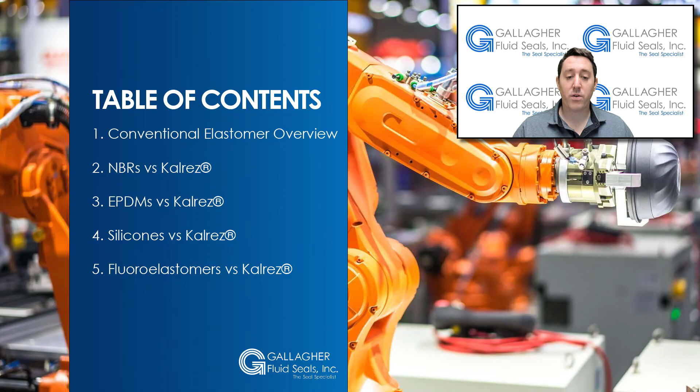Conventional elastomers come in many different types and grades. For instance, there are approximately 60 different grades of Viton, a fluoroelastomer, and 18 grades of Nordel, an EPDM. To further complicate this situation, each O-ring manufacturer or rubber fabricator then has a number of specific custom formulations or compounds for each grade. This multiplier effect essentially creates hundreds of different compounds in these conventional commercial elastomers.

Since Kalrez parts are predominantly used in sealing systems, it is useful to review the basic properties of the most popular seal materials. Other elastomers used for sealing include epichlorohydrin, ECO, PNF, polyacrylates, polysulfides, butyl, and neoprene. These materials are generally used in less demanding applications and have not been included for review in reference to use in seals.

Many grades are available of each base polymer that can be compounded to fit specific performance requirements of hardness, modulus, tensile strength, and elongation. However, regardless of what the compounder does, the basic chemical resistance properties of the polymer chain remain the same. We can, therefore, classify the properties and upper service temperatures of each polymer with some certainty.

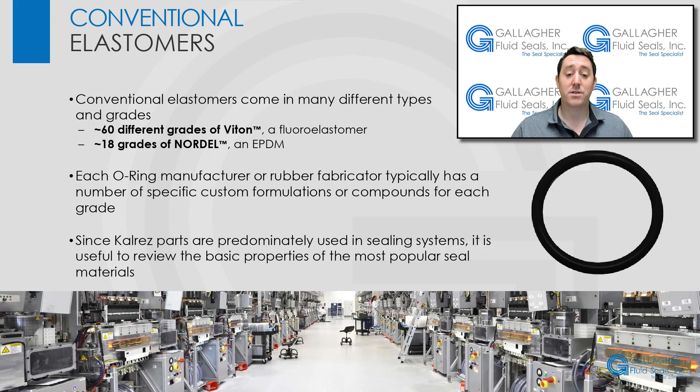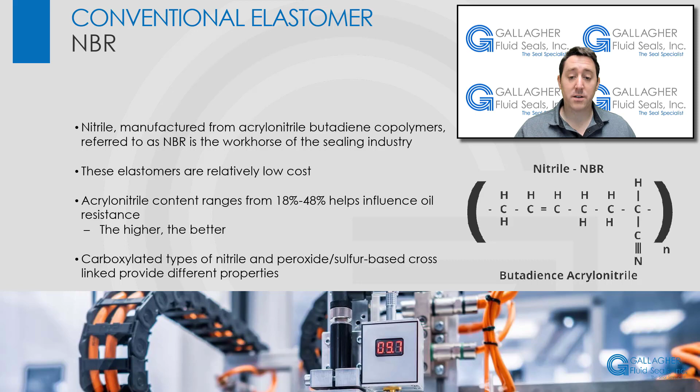Nitrile, manufactured from acrylonitrile butadiene copolymers, referred to as NBR or Buna-N after the original Bayer trademark, is the workhorse of the sealing industry. Acrylonitrile butadiene copolymers are relatively low-cost elastomers. The acrylonitrile content, which can vary from 18 to 48%, influences the oil resistance. The higher the content, the better the aromatic oil resistance. Carboxylated types offer higher service temperature limits, up to 250 degrees Fahrenheit. Peroxide and sulfur-based cross-linked systems are also used for certain applications.

Ethylene propylene copolymers, or EPR, are peroxide cross-linked. DuPont's EPDM, Nordel, as a terpolymer has diene added to the chain, which gives it the ability to be cross-linked with peroxide or sulfur-cured systems. Ethylene propylene elastomers are relatively inexpensive, and the best in pure uncontaminated steam-water service, up to 320 degrees Fahrenheit. This elastomer is often used in boiler feed water applications and for heat exchanger gaskets.

EPR rubber, however, has no oil resistance and very limited chemical media resistance. These elastomers have been proposed for use up to 450 degrees Fahrenheit in the absence of oxygen, as in downhole geothermal well service.

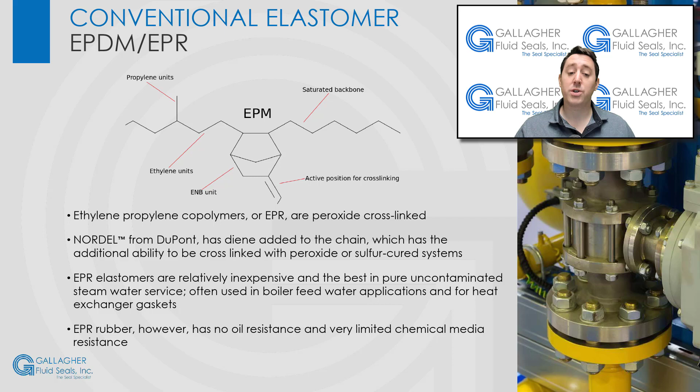Silicone was one of the first elastomers used for high-temperature service and is the highest production specialty elastomer produced today. Silicones have limited original physical properties at room temperature, but they retain most of their original tensile strength and tear resistance at elevated temperatures. Silicone is commonly used over its temperature limit, possibly because degradation byproducts are not nearly as toxic or corrosive as those produced by fluoroelastomers. Rapid hardening and embrittlement can be expected over 400 degrees Fahrenheit.

Silicone rubbers have no aromatic or aliphatic oil resistance, and in general, poor chemical resistance. Conversely, silicones have the best low temperature rating of any elastomer, down to negative 112 degrees Fahrenheit. It is important to note that at high temperatures in the absence of oxygen, silicone will begin to revert back to its original monomer state, resulting in a cheesy consistency and complete loss of physical properties.

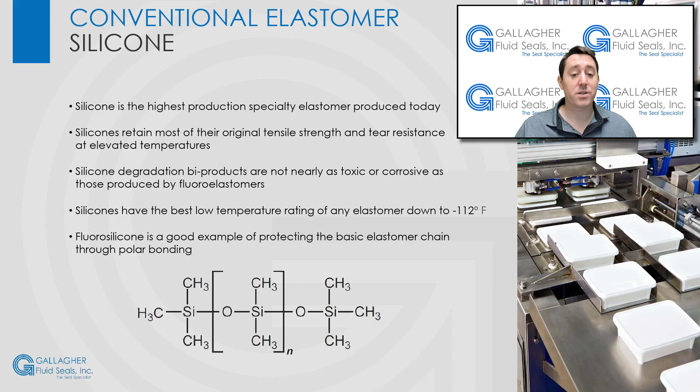Fluorosilicone is a good example of protecting the basic elastomer chain through polar bonding. The addition of fluorine to the basic silicone chain imparts very good oil-fuel resistance to the elastomer while retaining excellent low-temperature properties. Otherwise, fluorosilicones are much the same as silicones, apart from cost, which is much higher.

There are many grades or types of fluoroelastomers utilizing various cross-linking systems to achieve specific properties. The higher their fluorine content by weight, the more resistant the fluoroelastomers are to chemical media. Accordingly, TFE-propylene, or AFLAS, will swell much more than the Viton A, B, or G types in most chemical media.

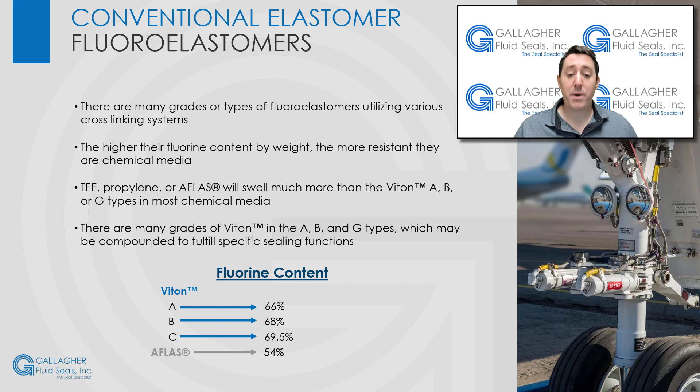There are many grades of Viton in the A, B, and G types, which may be compounded to fulfill specific functions, like anti-extrusion or lower compression set. Different cross-linked systems have a pronounced effect on water resistance. For instance, the peroxide lead oxide cross-linked Viton GF types are superior to other Viton types in hot water and steam. There is a low-temperature service Viton, GLT, which has chemical resistance similar to Viton A.

Viton B types have a high-temperature heat resistance up to 425 degrees Fahrenheit. All other grades are rated up to 400 degrees Fahrenheit. On the other hand, all fluoroelastomers will quickly swell beyond usefulness in ketones, esters, and some ethers.

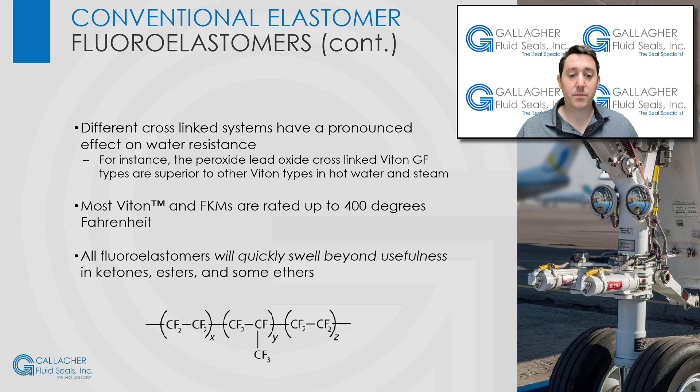Since Kalrez has the highest fluorine content of any commercial elastomer, approximately 73%, and is fully fluorinated on the backbone of the main chain, it is unique in offering an unsurpassed combination of heat and chemical resistance. Comparing the chemical structures of fluoroelastomers to that of Kalrez clarifies why Kalrez parts have such an outstanding performance in terms of heat and chemical resistance.

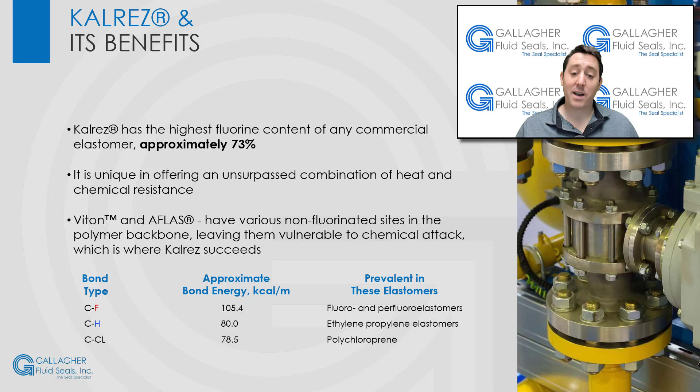Fluoroelastomers, Viton and Aflas, have various non-fluorinated sites in the polymer backbone, leaving them vulnerable to chemical attack. It is at these carbon-hydrogen sites unprotected by the polar umbrella of fluorine that the destruction of the chain can be initiated by aggressive environments or high temperatures. Furthermore, the cross-linking system used with fluoroelastomers is phenol or peroxide, making it susceptible to attack and unable to survive temperatures over 400 degrees Fahrenheit.

By comparison, Kalrez structure is completely protected by fluorine on every carbon or oxygen atom along the entire length of the polymer chain, and in most cases the cross-link is also fluorinated, further stabilizing the whole structure. All the cross-link structures used in Kalrez are designed to be stable up to 600 degrees Fahrenheit.

Kalrez parts are often used in environments where conventional elastomers, such as nitrile, EPR, fluoroelastomers, or silicones, are satisfactory from a chemical resistance point of view, but the actual service temperature of the application exceeds the higher temperature rating of the elastomer. In addition, in aggressive chemical environments, Kalrez may be required well below the upper service temperature limits of conventional elastomers. Nitrile, EPR, fluoroelastomer, and silicone will become hard and brittle when used beyond their upper service temperatures.

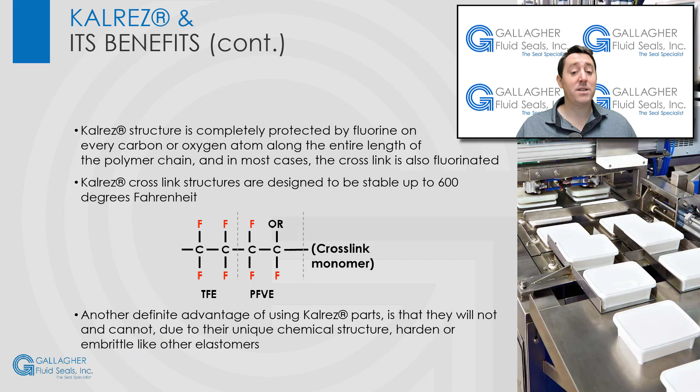Another definitive advantage of using Kalrez parts is that they will not and cannot, due to their unique chemical structure, harden or embrittle like other elastomers. Conversely, Kalrez actually becomes slightly softer and retains its sealing ability when in service at elevated temperatures. These are the maximum service temperatures of most common elastomers. Kalrez is by far the most heat-resistant commercial elastomer.

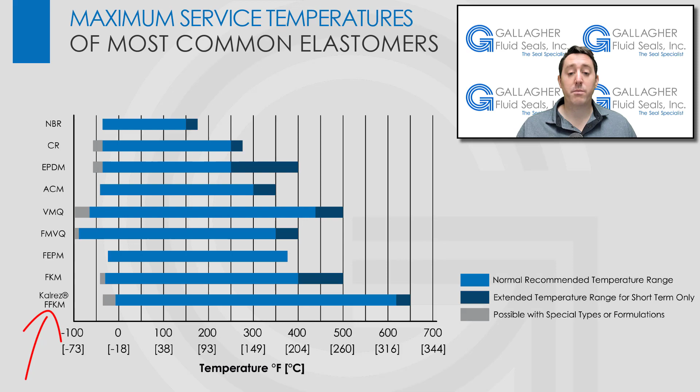The ASTM D2000 test standard determined at what temperature over a given time the elastomers retain this specific percentage of their original properties. Judging from the results, Kalrez is by far the most heat-resistant commercial elastomer available today. The bar chart here represents the swell of various seal elastomers in an aromatic media. What you see is gasoline at moderate temperatures of 130 degrees Fahrenheit.

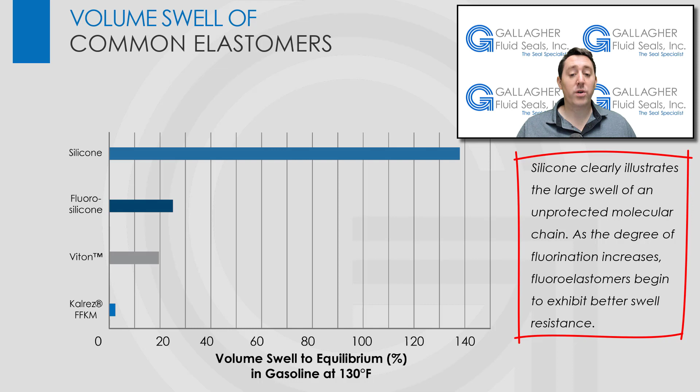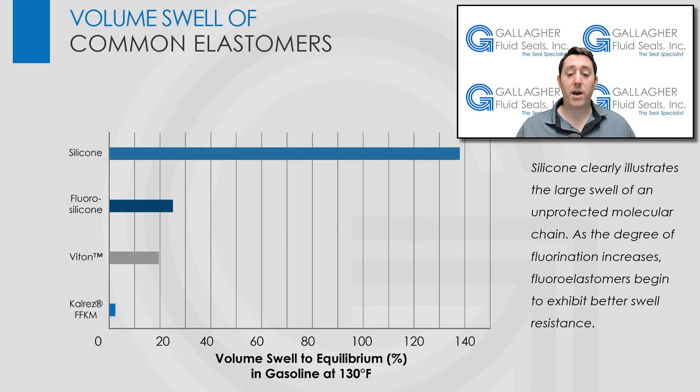Silicone clearly illustrates the large swell of an unprotected molecular chain. As the degree of fluorination increases, fluoroelastomers begin to exhibit better swell resistance. Elastomers which swell over 15 to 20% in a chemical media are not suitable for most O-ring applications because standard grooves do not have enough free volume to accommodate the swollen ring. Kalrez, which is fully fluorinated, hardly swells at all in this example of aromatic fuel or almost any chemical media.

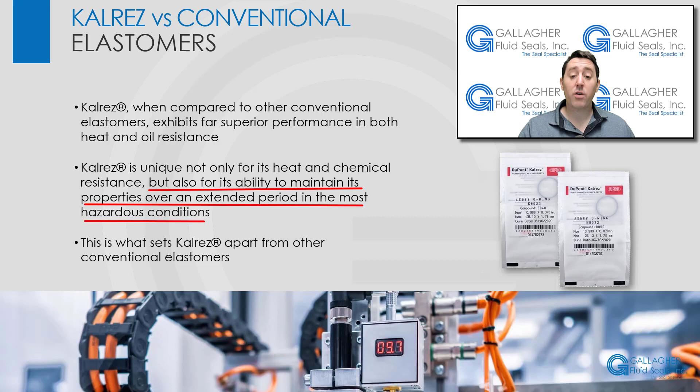Kalrez, when compared to other conventional elastomers, exhibits far superior performance in both heat and oil resistance. Kalrez is unique not only for its heat and chemical resistance, but also for its ability to maintain its properties over an extended period of time in the worst conditions. This is what sets Kalrez apart from other conventional elastomers.